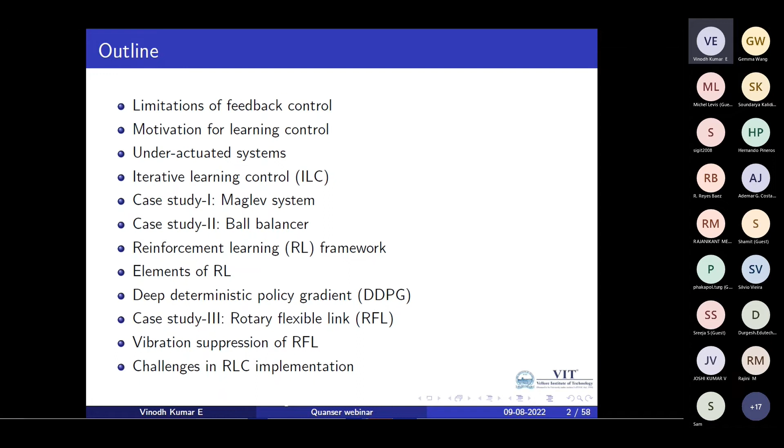Finally, I will discuss the real-time challenges that we have faced while implementing this DRL on an RFL system. With that, let me get started.

I would like to motivate the need for the learning control scheme through the celebrated Bode sensitivity integral problem, also called the waterbed effect.

Typically, the goal of a feedback control can be stabilizing an unstable system into a stable one, which can not only track the reference input, but also reject the external disturbances and attenuate the effect of the sensor noise. Hence, if we design a control in such a way that this sensitivity function and the complementary sensitivity function are small, then we would be able to achieve the required objectives.

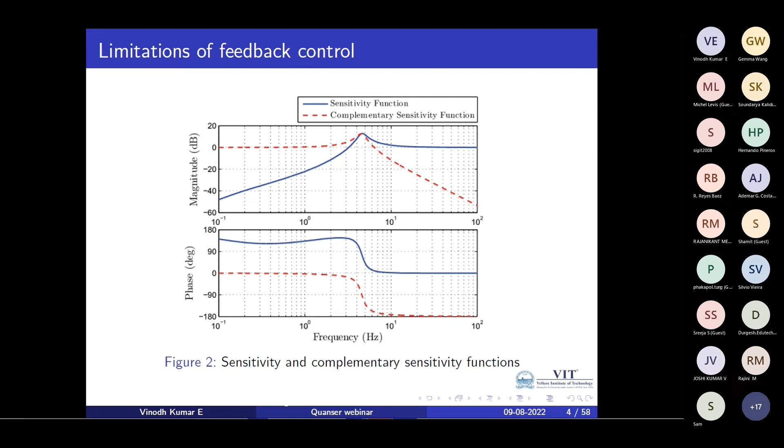So the question is, can we improve the performance of a feedback control by incorporating the concept of learning into the framework of a control scheme? That motivated us to turn to this intelligent approach called learning control scheme.

Of course, there is one more motivation. Most of the model-based approaches require the exact plant model. But when we go for either the first principles model or the physics-based model, it is not possible to accurately model the dynamics of a system. There will always be some neglected dynamics, which may result in poor control performance. So is it possible to have a control framework which can compensate this aspect? Of course, the answer is yes, through this learning control scheme.

This learning control scheme draws inspiration from the way humans learn things. One simple analogy we can relate here is that a person trying to learn the skill of playing basketball. If he is attempting a free throw from a fixed position, by observing the trajectory of the ball over subsequent trials, he or she would be able to acquire the skill of playing the game in an effective way.

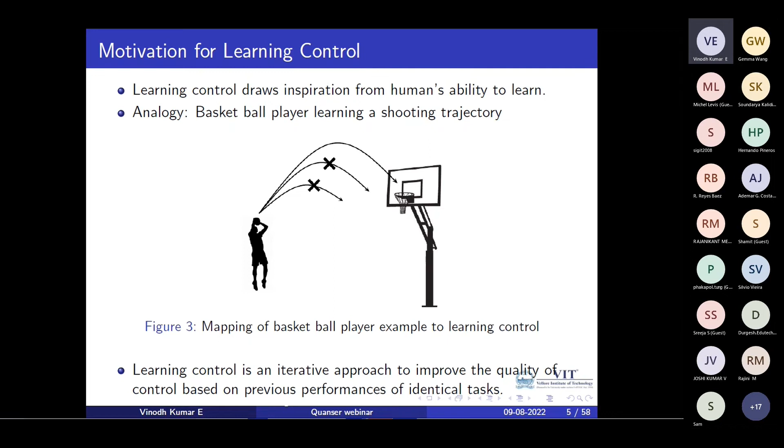This learning control scheme is an iterative approach which is used to improve the quality of performance for the system that performs the task in a repetitive way. Another major reason for this learning control is that most non-learning control schemes, such as PID, continue to result in the same tracking error in every trial. Or we can also put it like this: the PID controller fails to capitalize on the information-rich tracking error signal.

Way back in 1984, a group of researchers from Japan asked this question: is it possible to improve the performance of a repetitive system by learning the dynamics of the system through the error sequence? Of course, the team led by Arimoto came up with an answer that yes, it is possible, and they formulated the basics of this iterative learning control. So in short, by making use of the error signals and the control sequence that was supplied to the system in the previous iteration, the iterative learning control aims to improve the performance of a repetitive system iteratively.

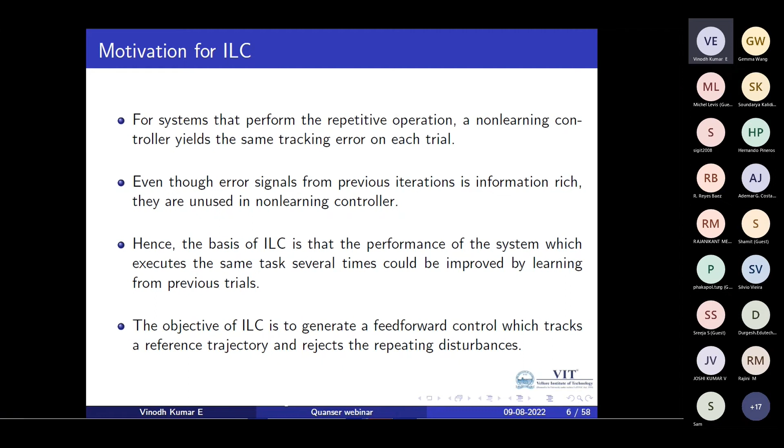So that's the basis, and it's actually a kind of a feed-forward control scheme. The ILC is a kind of feed-forward control scheme which would be added on top of the existing feedback control structure. In most applications, we may not have the privilege to altogether replace the existing feedback controller to improve the performance. Is it possible to improve the performance by augmenting another control scheme in the form of a feed-forward structure? Yes, it is, through this ILC.

As mentioned, this ILC is initially proposed for a repetitive system. So what is meant by a repetitive system? The system which performs the task over and over again. For instance, in the case of a robotic manipulator, say if it is used for material transfer application, such as moving an object from one location to another location.

If the robot performs the same operation over and over, it would continue to result in the same tracking error in the case of non-learning controllers. Whereas what this ILC aims to do is capitalize on the error signal and the control signal supplied in past iterations, so that it could come up with a new set of control sequences.

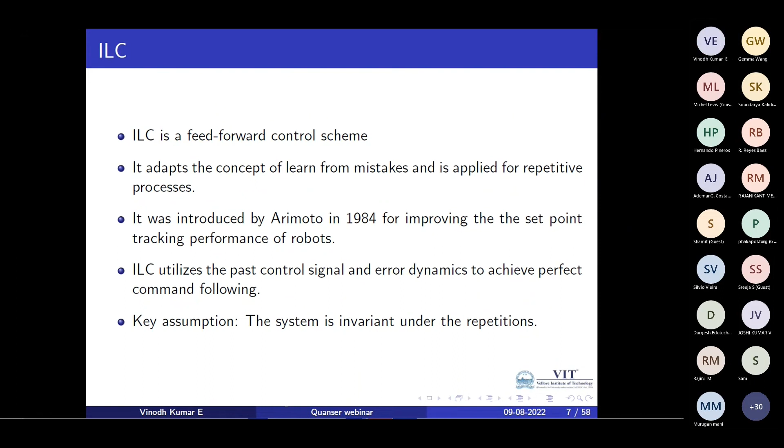Basically, making use of the control signal supplied in the previous iteration and the tracking error, the iterative learning controller produces the supplementary control action in such a way that it can iteratively minimize the tracking error.

So the goal of this ILC is to design the control sequence U of k plus 1 by making use of the previous information. What do we mean by previous information here? By utilizing the previous control signal supplied to the plant and the tracking error, the goal is to ensure iteratively that the output follows the desired trajectory.

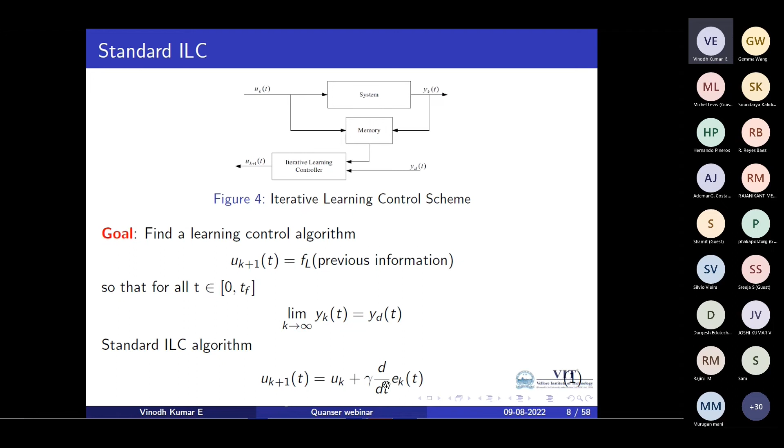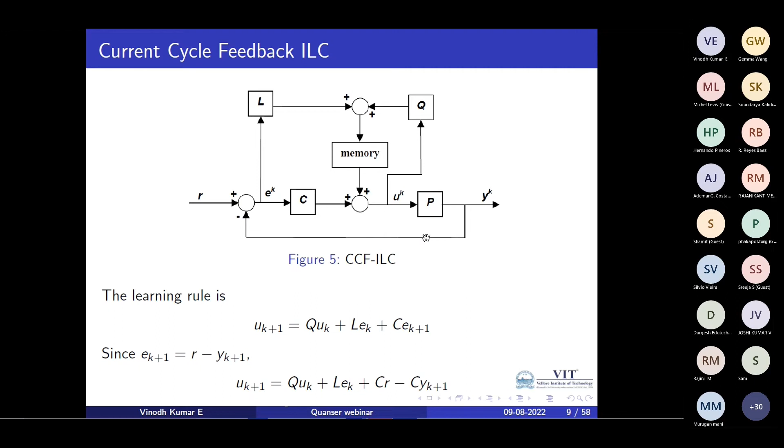And then we can replace this factor EK plus 1 with this expression and do a manipulation such that you segregate the like terms together. Take this U of k plus 1 term to the other side and combine the terms of UK, separating that into the control signal and the reference input. Then if you take this factor to the other side, we can come up with the expression for the control signal for the next iteration.

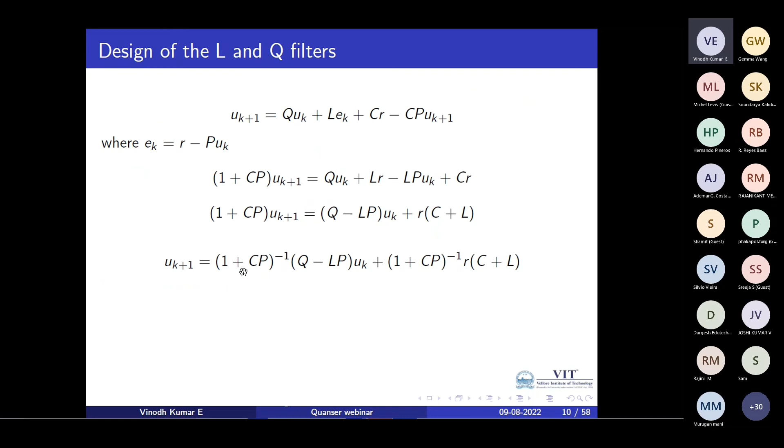For this control sequence to converge, we need to design the learning factor rho such that the norm of the difference between the control sequences is monotonically decreasing. Hence, from the previous expression, if we select this factor which is associated with the control signal to be much lesser than 1, we would be able to achieve that.

And ideally, if we select this factor Q minus LP to be 0, it ensures the convergence. So from this, we can find out the expression for the learning filter L. It would be given by P inverse times Q. So the learning filter can be determined by making use of the inverse of the plant model multiplied with the roll-off filter.

In order to guarantee the robustness, typically the Q filter is chosen to be a low pass filter. Hence, combining this, the updated control law for this ILC can be written as L times EK plus Q times UK.

So the design of this ILC is all about the selection of the L and Q filters. The Q filter is typically chosen to be a low pass filter, and L is determined based on the plant inversion technique.

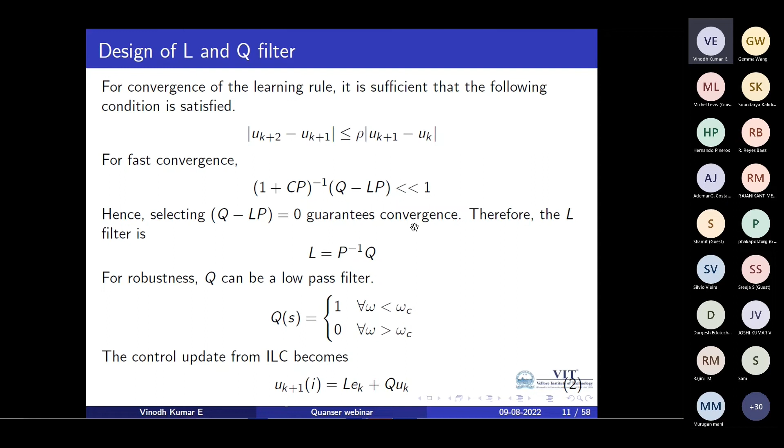I'm going to explain how we applied this for a couple of under-actuated systems that we used from Quanser. Before I talk about it, I just would like to motivate what is an under-actuated system. Typically, under-actuated systems have fewer actuators than the degrees of freedom to be controlled. And what is the reason for introducing this under actuation?

Of course, there are many reasons. One is we would like to reduce the weight of the system, the cost and energy, and also tolerance for failures. We also would like to ensure that the same amount of dexterity is maintained even if it is an under actuated system. So one challenge is that unlike a fully actuated system, which has the same number of actuators as degrees of freedom, with fewer actuators we are trying to have the same dexterity, so the control becomes a little more challenging.

Under-actuated systems are predominantly used in several applications, such as mobile robots, spacecraft, and locomotive systems. Coming to the academic environment and the kind of experimentation we do in the laboratory, we do have a couple of systems such as the magnetic levitation system and the ball and beam system, or ball balancer.

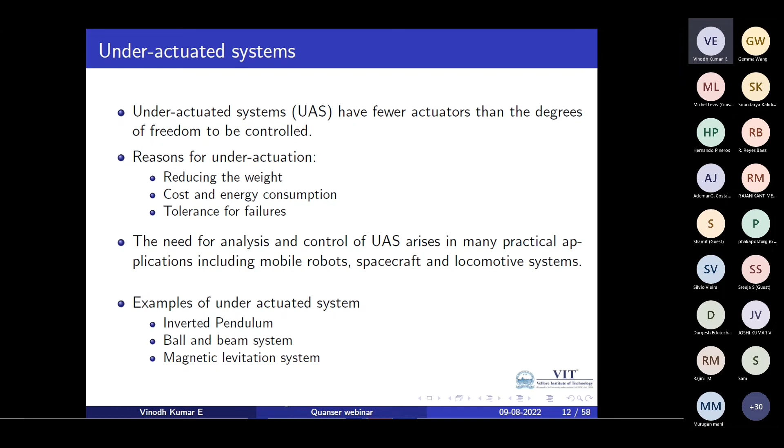The basic idea is that the magnetic levitation contains the electromagnet at the top and a photosensory circuit at the bottom. The objective is to make the steel ball levitate by controlling the current given to the electromagnet. According to the amount of current given, it generates an attractive force. The point at which this attractive force equals the gravity force will make the ball levitate. So by controlling the coil current, we would like to control the position of the ball.

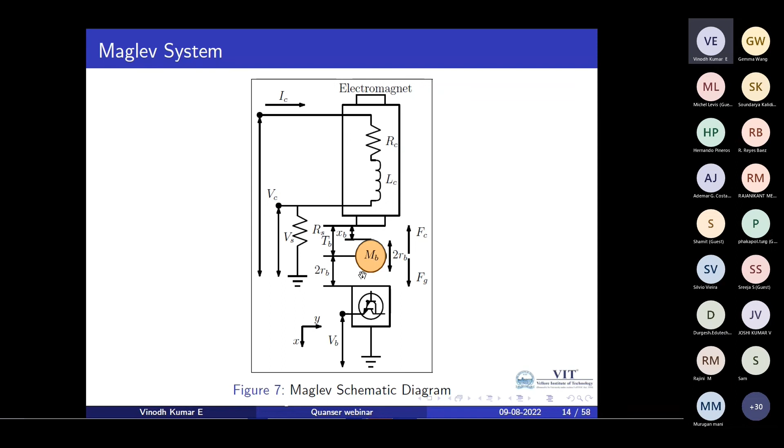Typically, if we see the first principle model of this magnetic levitation system by accounting for all the forces acting on the ball, the total force acting on the ball is a combination of the gravity force and the attractive force created by the electromagnet. It's actually a second degree equation, and taking a Laplace transform and then finding the ratio of the ball position to the coil current gives this transfer function.

So what it basically conveys is that we can notice from the denominator polynomial that it has unstable poles. One pole is on the left half of the plane and another one is on the right half of the plane. So that motivates us to go for a feedback controller.

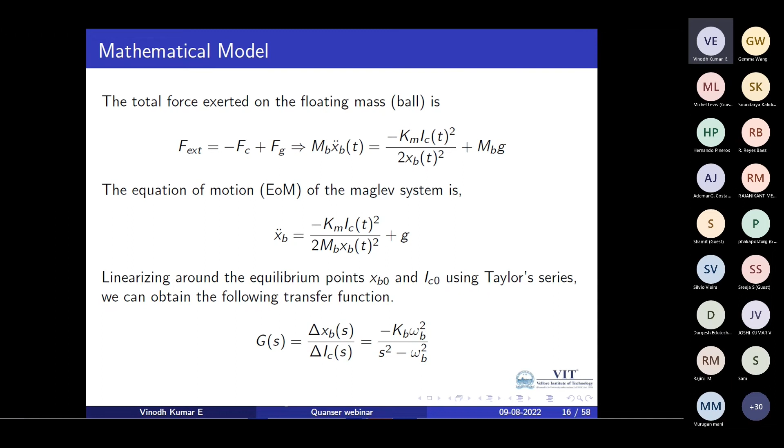So it is important to mention that here in our work, we actually had a goal of improving the trajectory tracking performance of a magnetic levitation system. To achieve that goal, we augmented the standard PIV control scheme with the iterative learning control scheme.

What you see here in the dashed line is the standard PIV control scheme, and the one shown in red dashed line is the iterative learning control scheme. So the control input to the plant is a combination of the control signal generated by the PIV and the control signal generated by the iterative learning control.

As mentioned, the plant is unstable in open loop. Hence, to stabilize that, the PIV controller is utilized. The goal of this iterative learning control is to make use of the information rich error signal and come up with the control sequence that would iteratively minimize the tracking error.

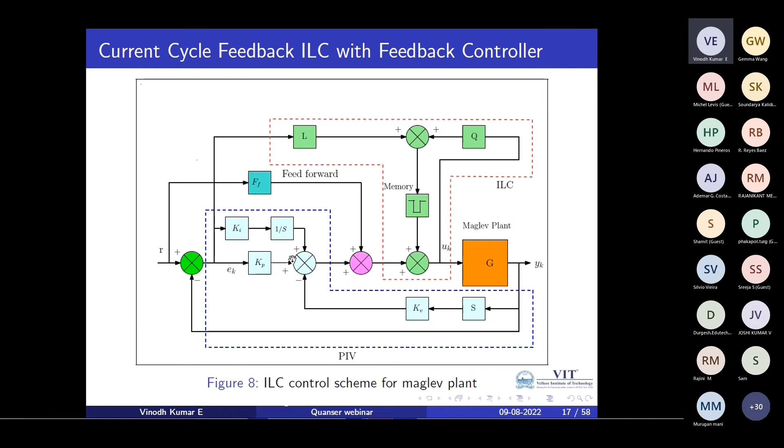So in short, this would take care of the stabilization process, and this would ensure that the tracking error is iteratively minimized. And we would also show the performance of a system which has only PIV controller and the system that has a combination of PIV and the iterative learning control.

Before that, these are some of the standard parameters that we have used for the feedback controller, PIV based on the pole placement technique. According to the dynamics of the magnetic levitation system, the filter is chosen to have a low pass filter characteristics. And then the learning filter L is determined based on the plant inversion technique.

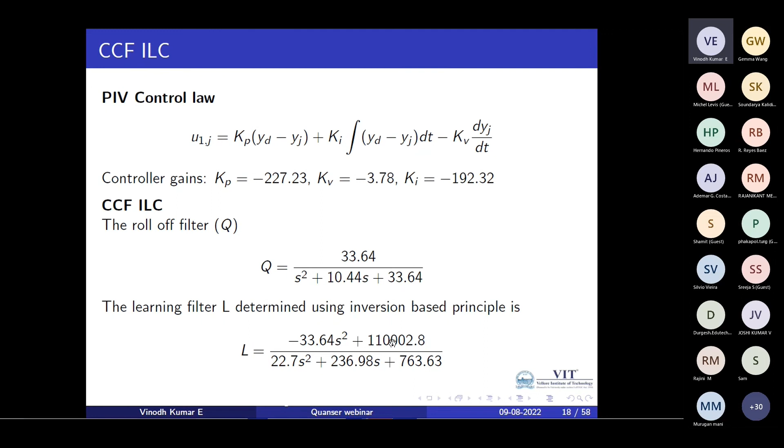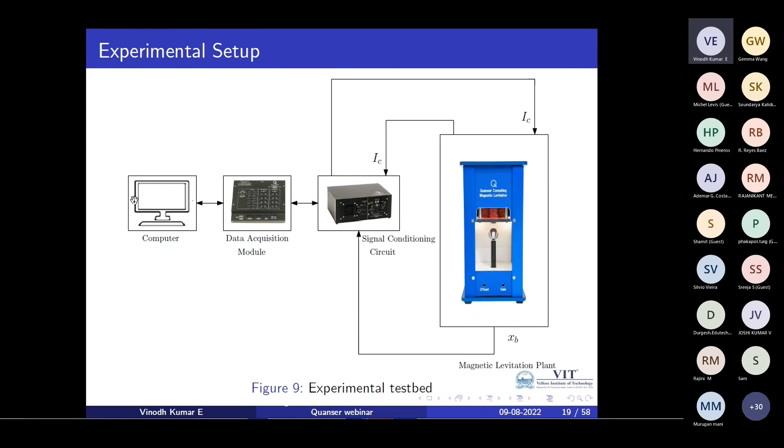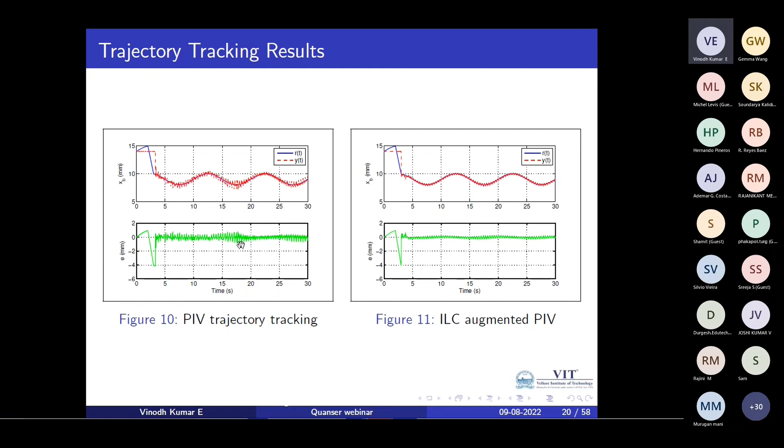In order to analyze the performance, this plot shows the CPSD of the tracking error. CPSD stands for cumulative power spectral density. We can notice from the CPSD plot that in the high frequency region, the performance of ILC is significantly better than the performance of the PIV controller. So by augmenting ILC, we can achieve reduced vibration around the steady state and also improve the high frequency tracking performance.

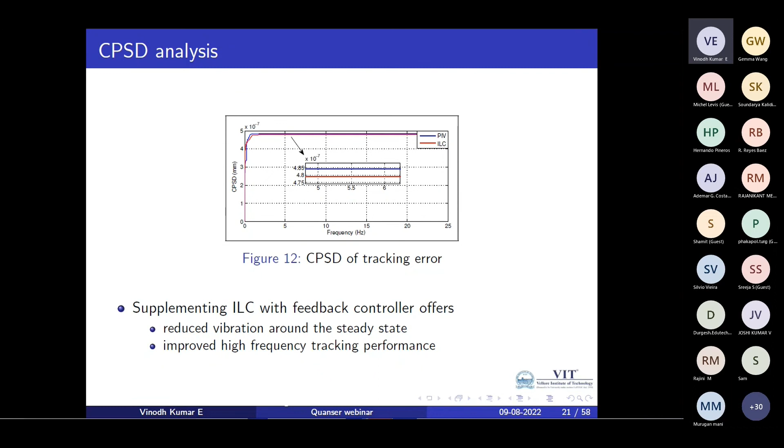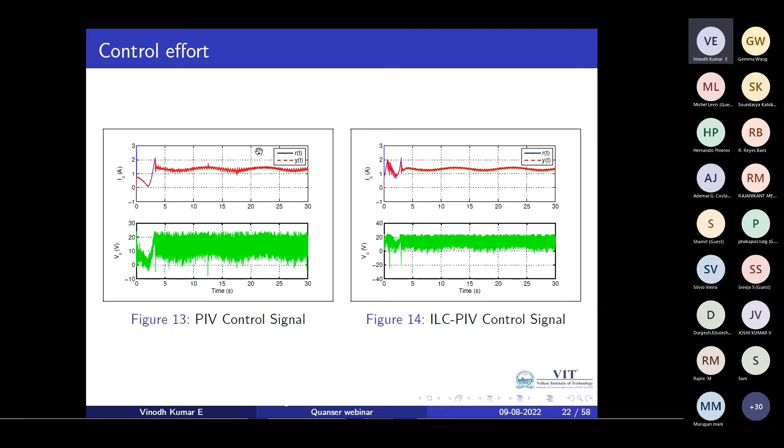So this is one such system that we have tested the response of an ILC. And of course, this shows the amount of control effort supplied to the electromagnet, that is the coil current. So this is for the PIV and this is for the augmented one.

Finally, to assess the robustness of the control schemes, both control schemes have been supplied with some external disturbances and the responses were recorded. What you see on the left-hand side is the response of only PIV. You can notice that the magnitude or the deviation of the measured output and the time taken to come back to the reference tracking is significantly large in the case of only PIV compared to the PIV ILC.

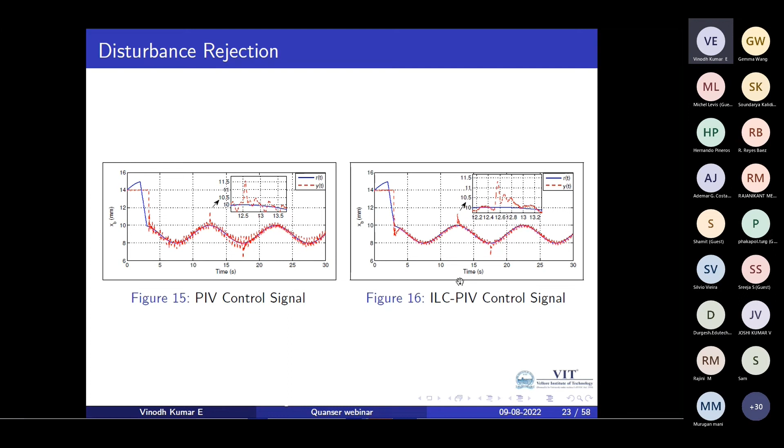So I just would like to play one simple video that we have actually recorded while conducting this experiment. So just a minute.

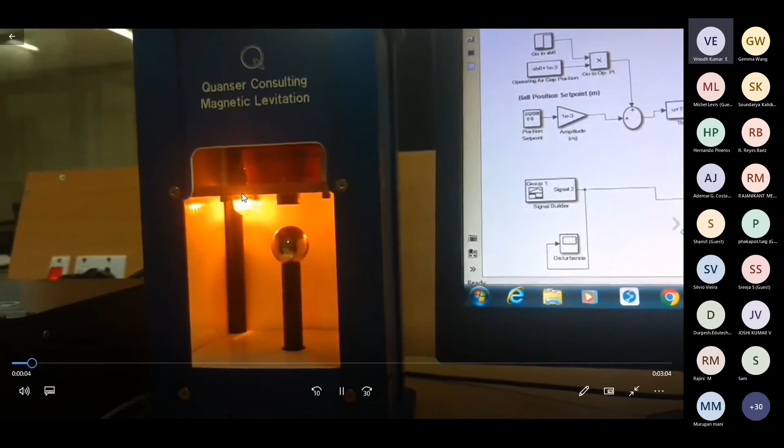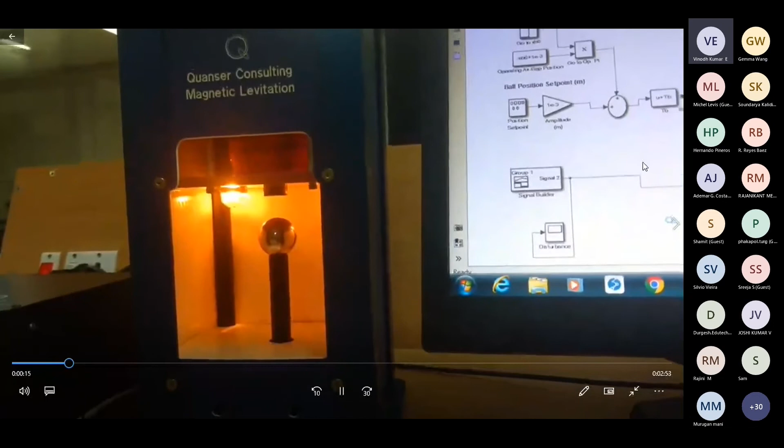This is the magnetic levitation plant, and the control algorithm is implemented in Simulink, and for the interface we use QUARC. What you see on the screen is the experimental demonstration of this ILC PIV scheme.

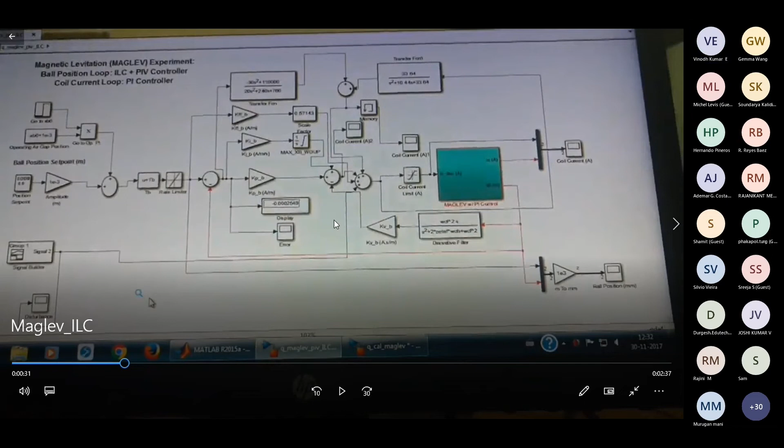I'll play this and show the response of the system. Typically, a two-channel DAQ is used for measuring the signals.

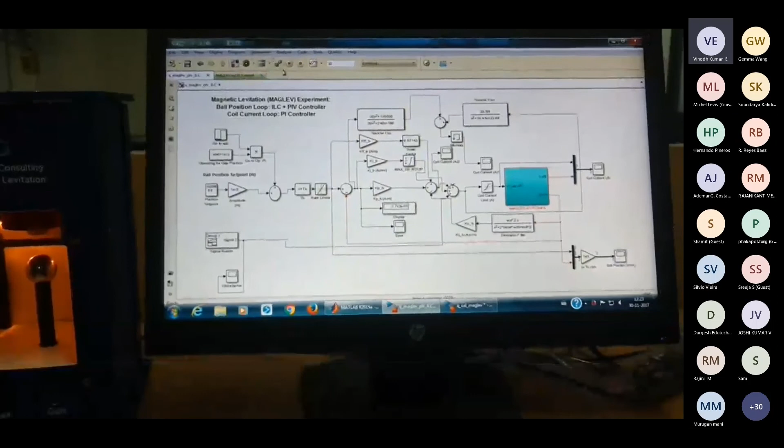This is the response of only the PIV controller. You can notice that the ball is getting levitated, but the response is a little oscillatory around the reference trajectory.

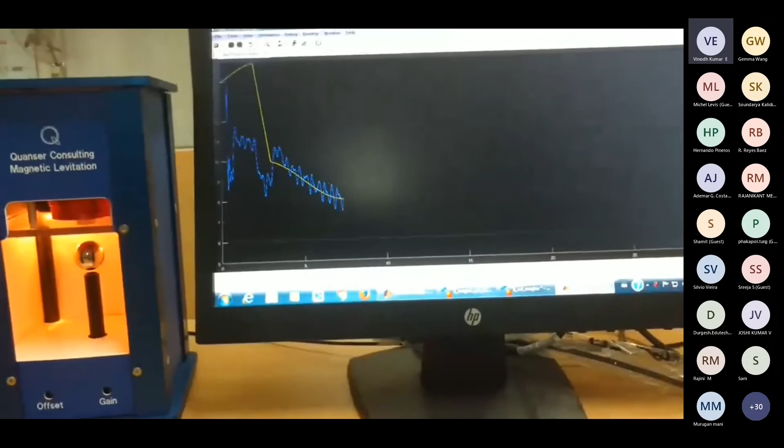Now this is the response of the augmented PIV and ILC. Compared to the previous case, when tested on a real-time setup, we could see that the deviation has significantly reduced. And here is the response of the system when it has some external disturbance.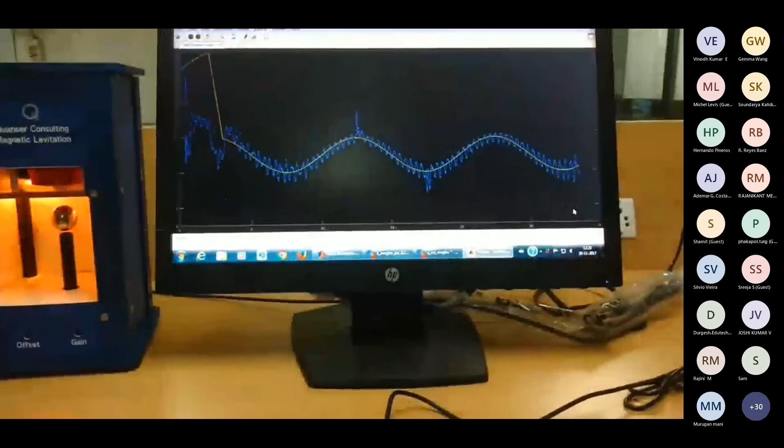The second system that we attempted was the ball balancer. This schematic diagram conveys the overall idea of the scheme. By taking visual feedback of the plate, we come up with the corresponding servo angles that can maintain the plate as a stable one, so that the ball can move according to the user trajectory.

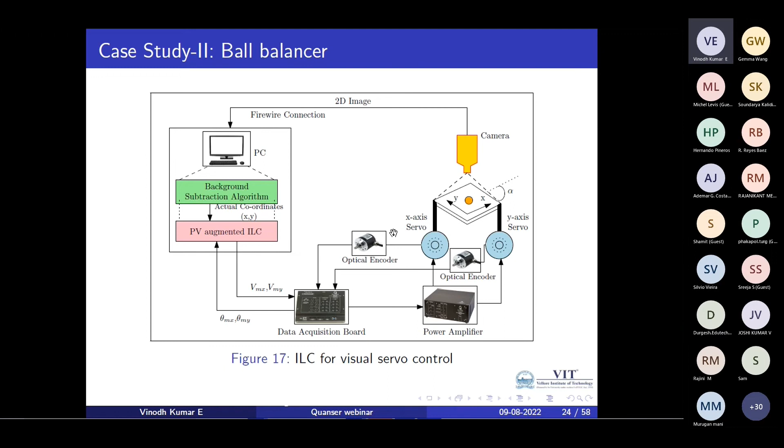As this is a cascade control scheme, we augmented the ILC with the outer loop. The inner loop is actually a servo for controlling the servo angle, and the outer loop is used for controlling the ball position.

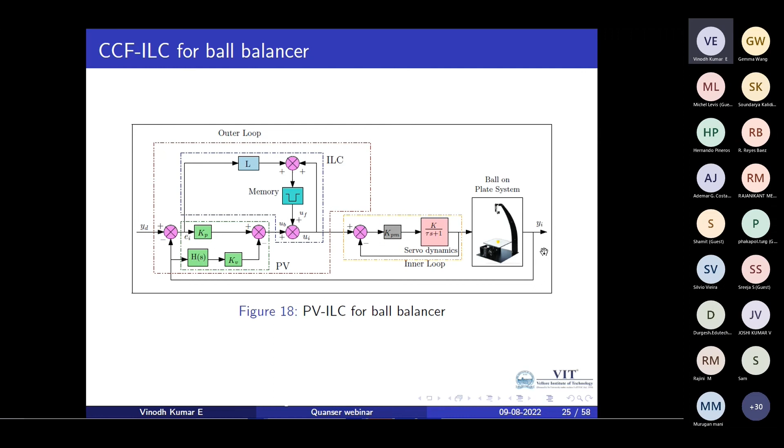The feedback controller is augmented with the iterative learning controller to ensure that the tracking error is minimized. The response that we recorded in the form of a phase plot is shown here.

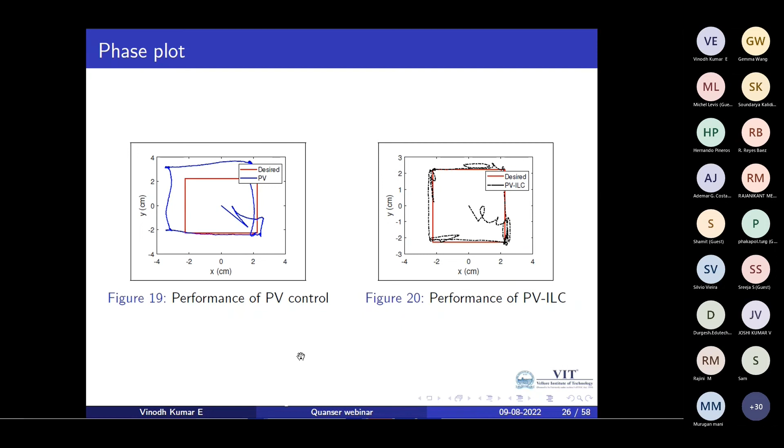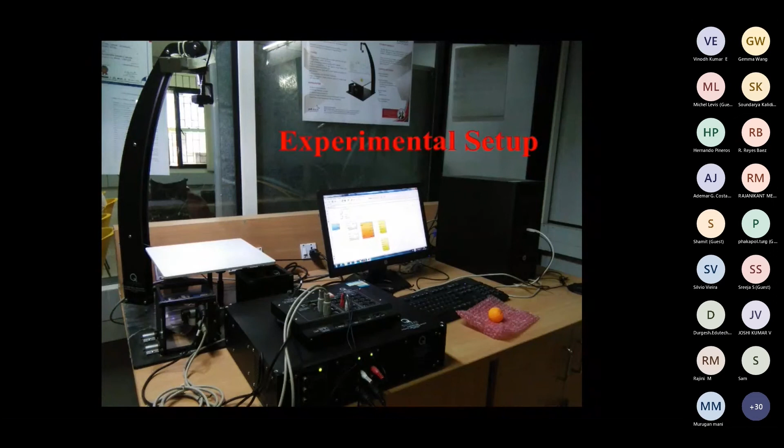I'll play another video which shows the different test cases that we attempted for this visual servo system. This is the experimental setup with the data acquisition board, signal conditioning circuit, and the ball balancer unit.

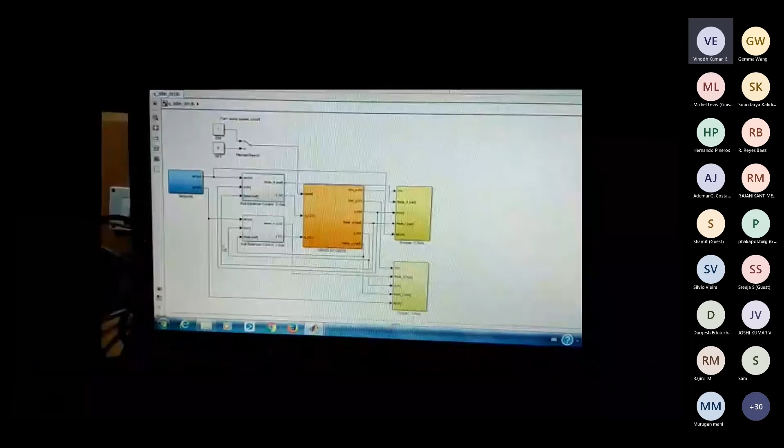Three different test cases were attempted. What we are going to see now is the combination of PV and ILC, that is proportional velocity controller augmented with iterative learning control. This shows the Simulink model.

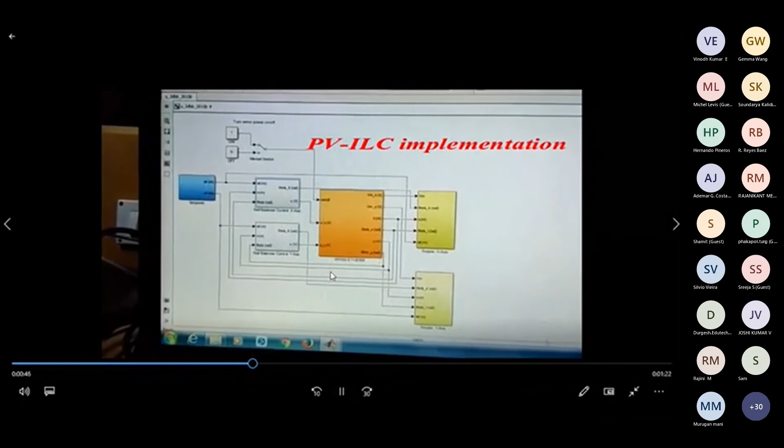The first test case we attempted was a robustness assessment. The goal here is to check how closely the ball is able to track the reference trajectory, even if the lighting conditions around the system are poor. Deliberately, the lighting conditions around the system were made poor, and the response of PV and ILC were tested.

Similarly, the second test case is the stabilization characteristics of the control scheme when it has a stochastic initial condition. So when the ball is thrown from different positions at a random speed, we check whether it is able to stabilize on the plate or not.

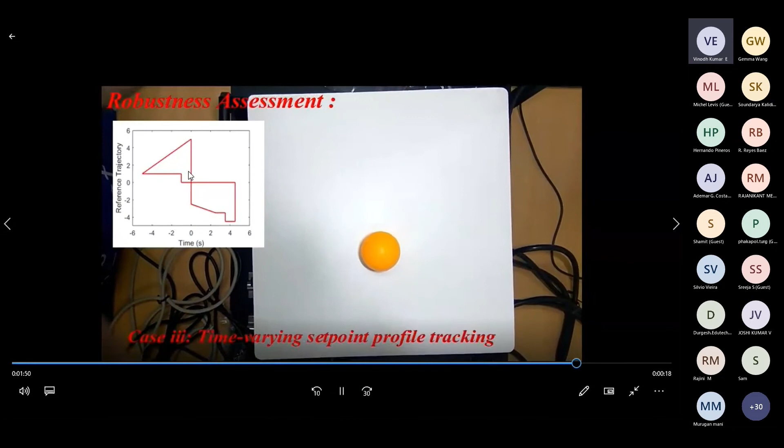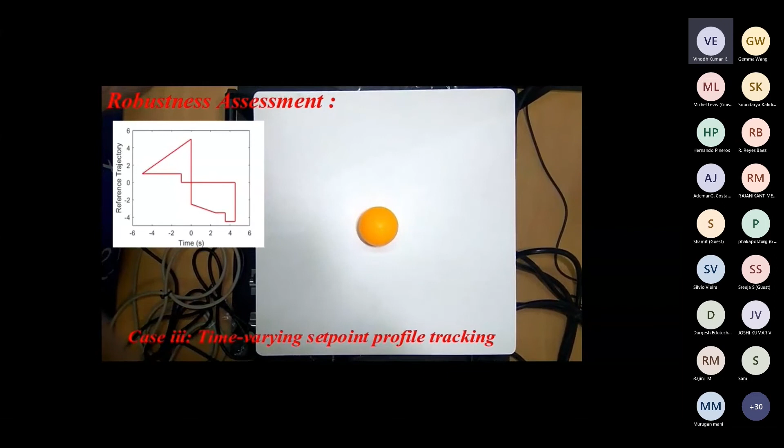In short, augmenting a learning scheme with the feedback controller for a repetitive system can improve the tracking performance significantly.

That takes us to the end of the first part. Now I'd also like to briefly touch upon another learning control scheme called reinforcement learning control that we implemented for a rotary flexible link system.

We know reinforcement learning is a kind of machine learning algorithm. This reinforcement learning is a model-free framework which contains two basic entities: an agent and an environment. The agent takes an action and observes the state information, and according to the action it has taken, it receives some reward. The overall goal of reinforcement learning control is to maximize the reward that the agent receives.

So it's a kind of goal-oriented computational paradigm. It aims to train the agent in an unknown environment so that without any supervision, the agent can acquire the knowledge or ability of achieving the goal through interaction.

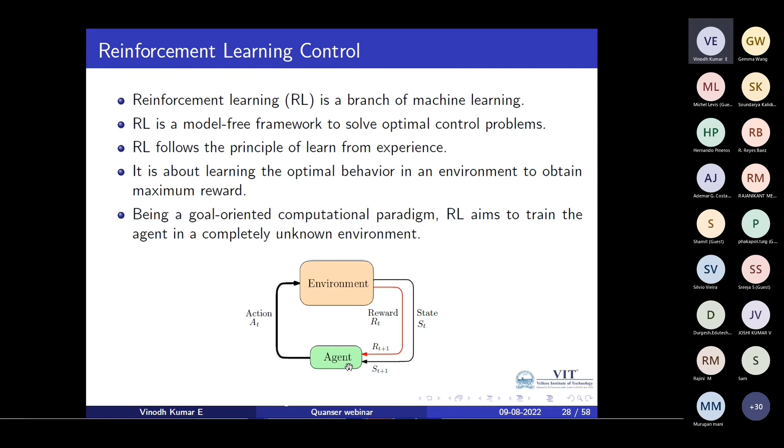I'd like to touch upon the standard RL framework, the one from MathWorks. So what you see here is the agent, which contains the policy. The overall goal is to identify or come up with an optimal policy such that the control goals are met. Here, the agent takes an action.

Anything outside the agent is viewed as the environment. When it takes an action, it observes a state, and based on the actions taken, the agent receives a reward. Based on the reward, the learning algorithm decides how good the actions are. Accordingly, it updates the policy, and iteratively this improves the performance.

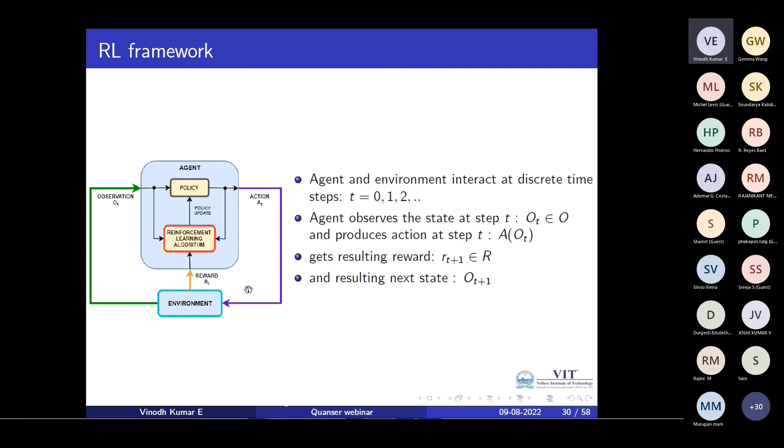Since it's based on trial and error, training the reinforcement learning agent is an important aspect in control implementation. What we see here is the standard comparison between conventional control systems and the reinforcement learning framework.

In the interest of time, I'd like to move on to the implementation of one kind of RL framework that we attempted.

Typically, the RL workflow contains seven different tasks. One is to formulate the problem, that is, the kind of problem we are trying to address. Then we need to create an environment — anything outside the agent is viewed as an environment in the RL framework. And we need to identify what the reward function is.

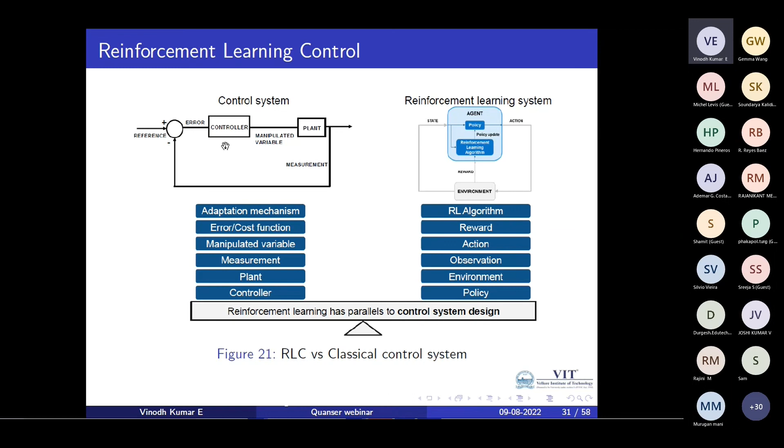Typically, when we say a reward function, it could be mapped to the corresponding cost function in the case of conventional feedback control. Then we need to create an agent and train the agent in an external environment, and assess or validate the performance of the agent. If it has been trained, the trained agent can be deployed in the form of a policy.

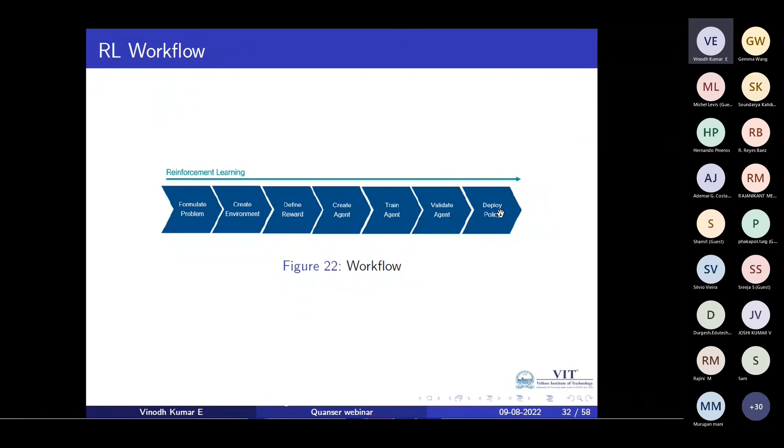This shows the different classes of deep reinforcement learning algorithms. Typically they are of two types: one is model-based, another is model-free. In model-free, there are two branches: value-based and policy-based. The one we attempted is the deep deterministic policy gradient algorithm, which is based on the actor-critic method, combining value-based and policy-based methods.

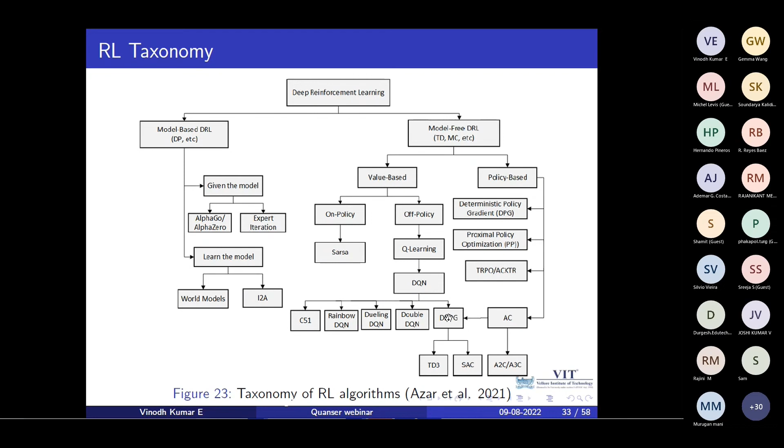The deep deterministic policy gradient is a model-free, off-policy actor-critic network. It basically contains a couple of networks: one is the actor network, another is the critic network. The role of the actor network is to generate the action and learn from the states, and the purpose of the critic network is to assess how good the actions are.

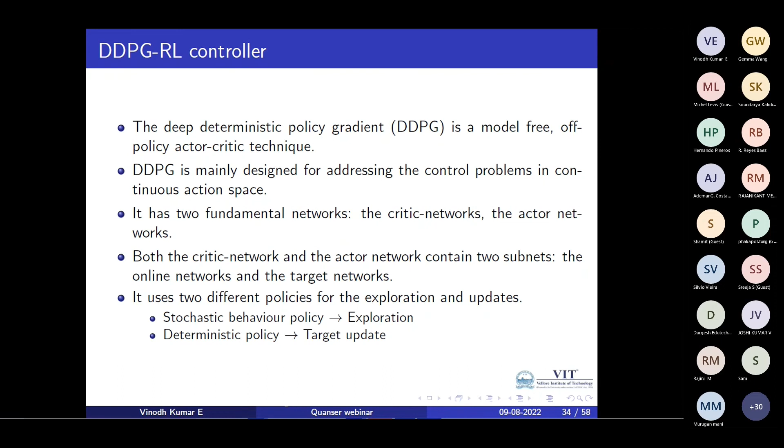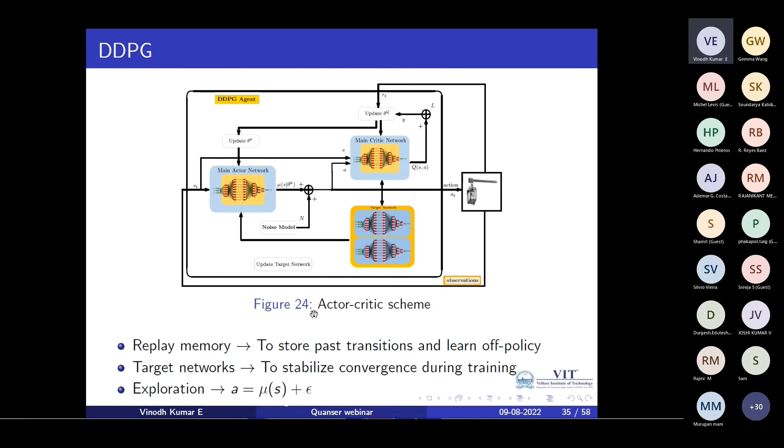Initially, we set the critic network and the actor network, and take a copy of the networks such as the target and the main networks. Then we use a concept called replay buffer so that we take a mini sample of the transitions available in the network for training the agent.

First, the actor network performs an action. For the action it has performed, it receives the reward and observes the states. Based on the measured states and reward, it computes the Q value, and through that it minimizes the loss function by means of a temporal difference error. So this loss function is obtained by minimizing the error based on the temporal difference.

Then the gradient ascent approach is used to update the policy network so that this process is repeated until the network has received the maximum reward. Finally, in order to ensure the stability of convergence, soft target update is followed, so that the target network is updated initially, and then based on the performance, the main network is updated later.

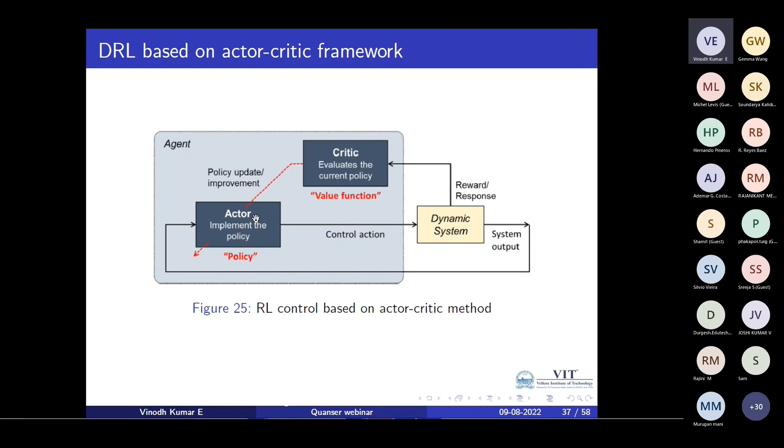This is actually implemented for a simple rotary flexible link system. We know that the rotary flexible link system contains a servo motor, and on the shaft of the servo motor an external flexible link is attached. The control goal is to make sure that the servo follows a reference trajectory, while ensuring the vibration at the tip is as minimum as possible. This is one system which emulates the control challenges encountered in lightweight space structures such as robots and spacecraft. From a control standpoint, the manipulated variable is the control motor voltage, and the controlled variables are the servo angle and the deflection angle.

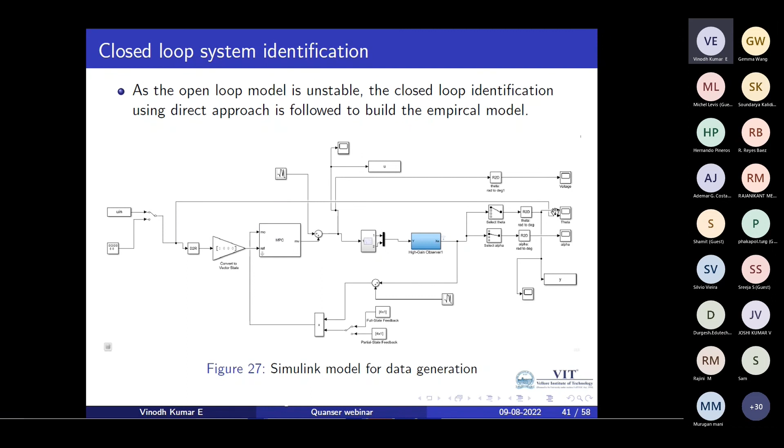The model predictive controller is implemented, and the input and output variables are recorded. The input variable in this case is the motor voltage, and the output variable is the servo angle. The input and output data are recorded, and then the power spectral plot of the RFL system is obtained. This shows the power spectral plot, from which we notice that the RFL exhibits low pass filter characteristics.

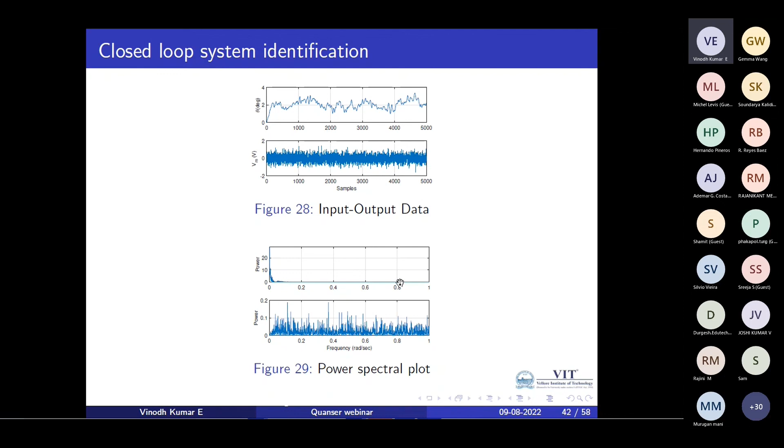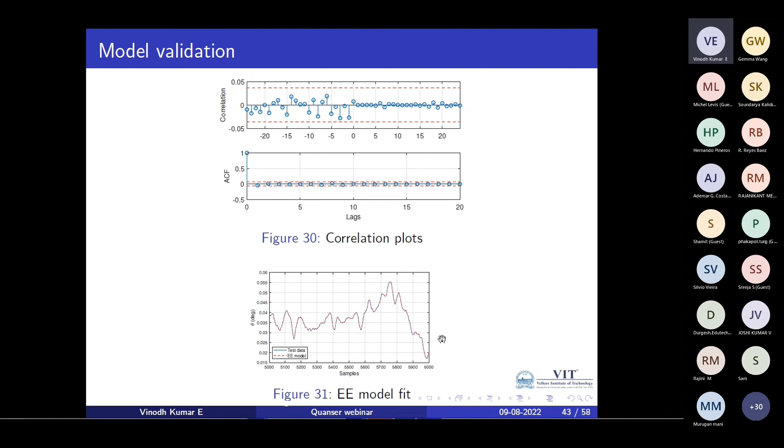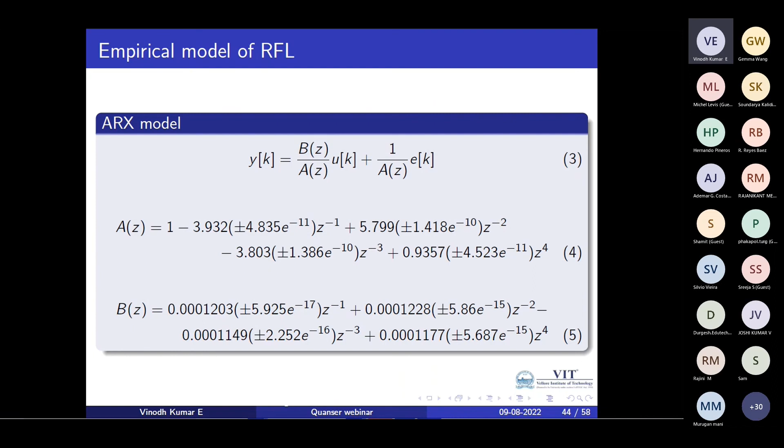So we built an ARX model, auto regressive model, based on the system identification technique. For comparison, we went for an MPC. Typically for the MPC, we used a sampling time of 2 milliseconds, a prediction horizon of 132 steps, and a control horizon of 2 steps.

It is important to mention that the system should respect the hard and soft constraints. The hard constraint here is the motor voltage, which should ensure that it does not cross 10 volts. The soft constraint is the deflection angle, which should guarantee that the deflection angle remains well within 5 degrees.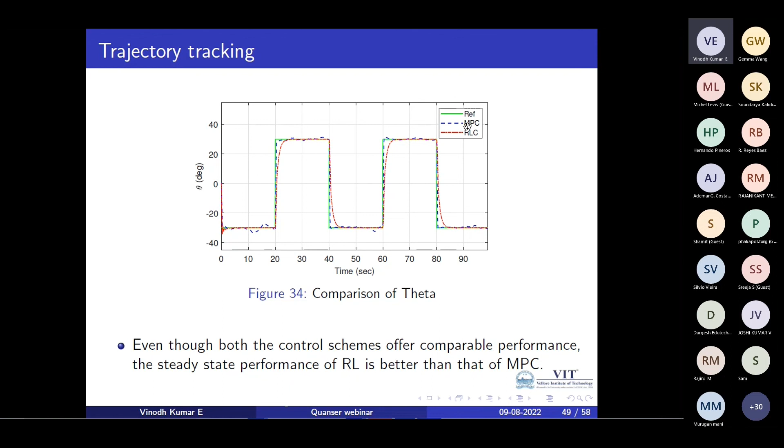And this shows the tracking performance of the reinforcement learning controller and the model predictive controller. What we see here in green is the reference or the command, the dashed blue line is the response of a model predictive control, and the dashed red one is the response of a reinforcement learning control. From the response, we can clearly notice that the reinforcement learning controller is better than the model predictive controller in terms of the servo tracking.

Similarly, the interesting aspect is that the vibration suppression feature of RLC is found to be way better than the suppression feature of MPC. You can notice the one shown in blue is the response of MPC and the one in red is the response of RLC. So the RLC is able to significantly minimize the vibration at the tip.

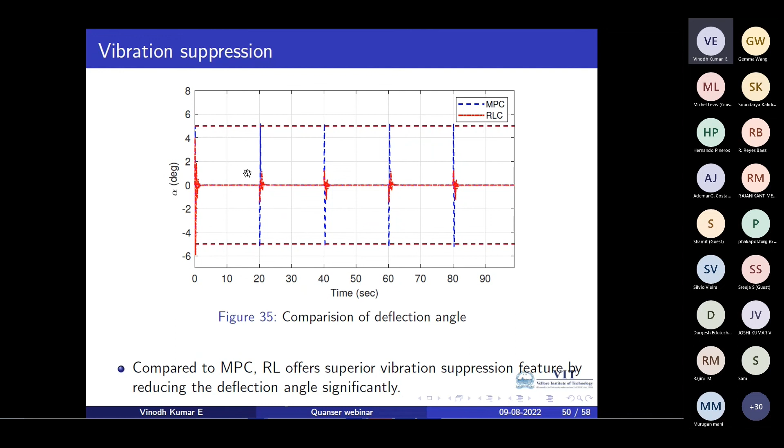And this shows the amount of control efforts applied to the system. The hard constraint that we had was it should be restricted within plus or minus 5 volt. We can notice that the hard constraints are respected, and the control voltage in the case of RLC is plus or minus 1 volt, whereas in the case of MPC it is plus or minus 2 volt.

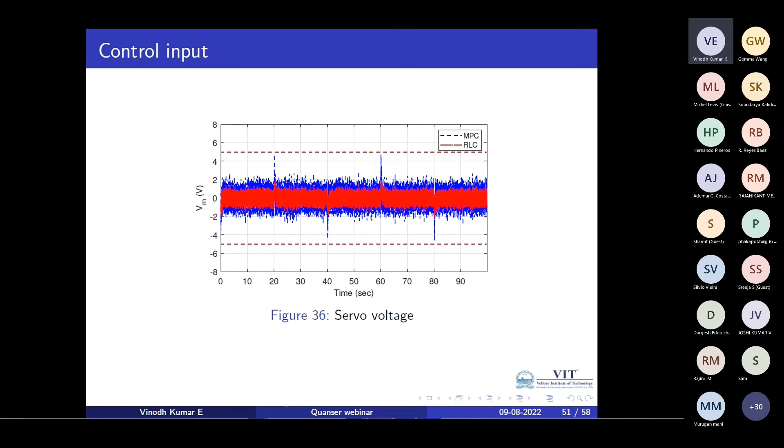Finally, for assessing the robustness, the external disturbance is injected in the form of a pulse signal into the system. You can notice the response of MPC and RLC in this plot. Notice the deviation in the case of MPC is significantly high, whereas the RLC is able to regulate the servo close to the reference trajectory. And this shows the zoomed in view of the same plot, particularly during this region.

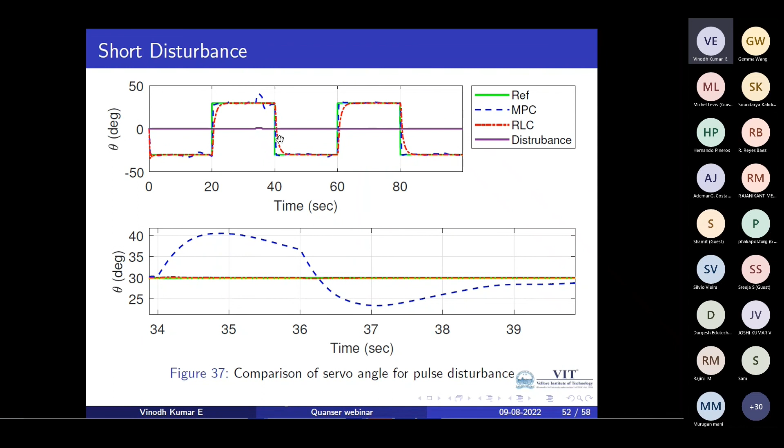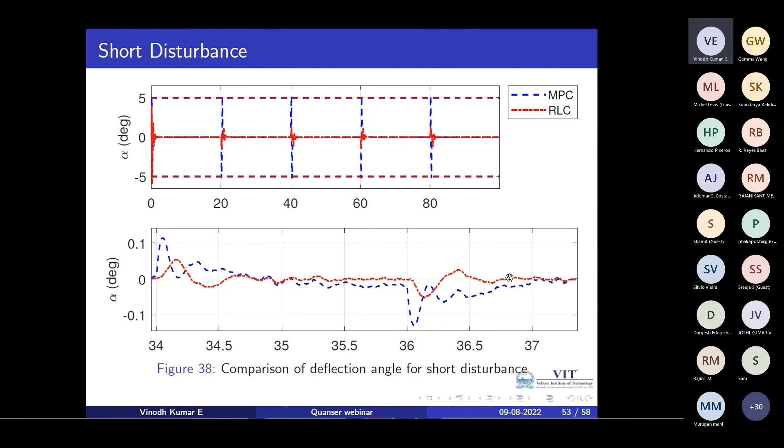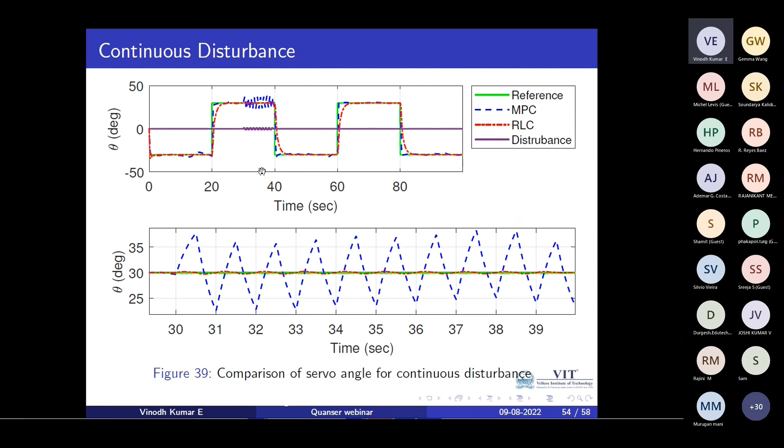And this is the response of deflection angle. We can notice that the deviation in the case of RLC is much less compared to the MPC. The similar test is also done for the continuous disturbance. As it is similar, I would like to wrap up this presentation by playing another video that shows the demonstration of this RFL.

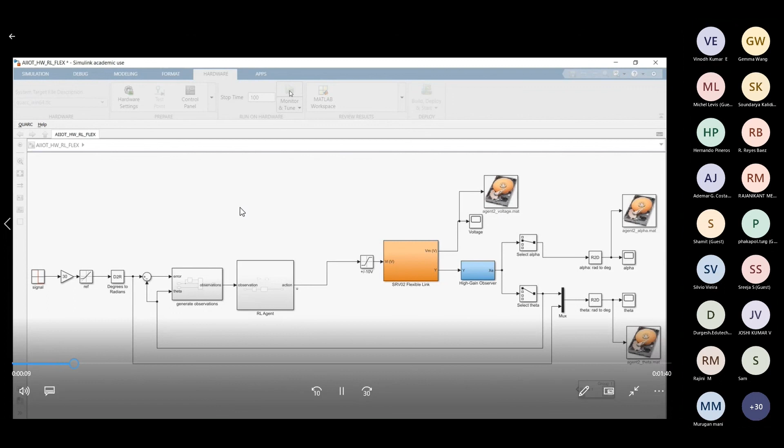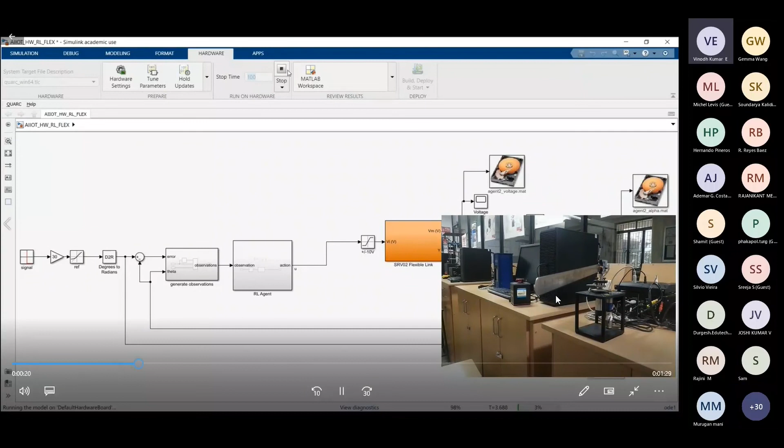Yes, so this is the real-time testing of the DDPG framework for the RFL system. What you see here in the inset image is the movement of the RFL system and the implementation in Simulink.

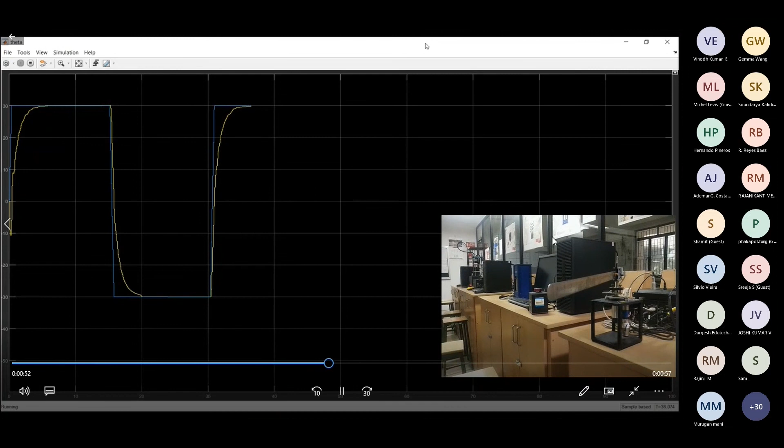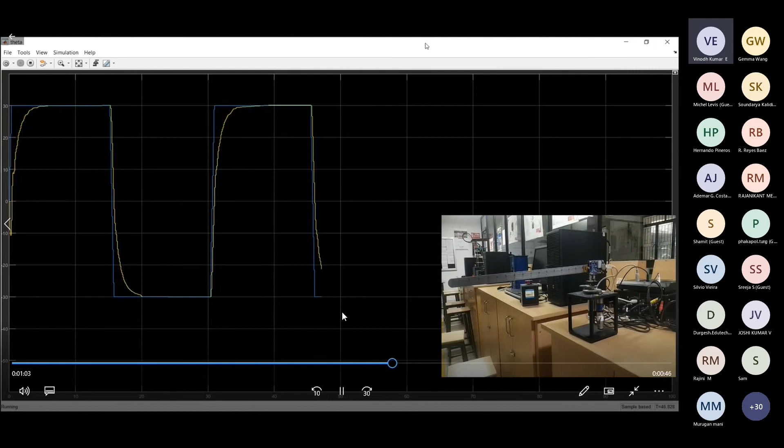So this is the response of deflection angle. You can notice that it is regulated well within plus or minus 1 degree. That is evident from this video that shows the flexible link movement.

All right, in the interest of time, I would like to wrap up this presentation by mentioning some of the challenges we faced in the RLC implementation. Selecting an appropriate reward function was a major challenge, and it is subjective to the system we are trying to deal with. The convergence is a major issue in the case of training, unlike the conventional approaches. It required several simulation trials to ensure that the agent has learned the system dynamics. And finally, tuning the hyperparameters made the design a little more challenging.